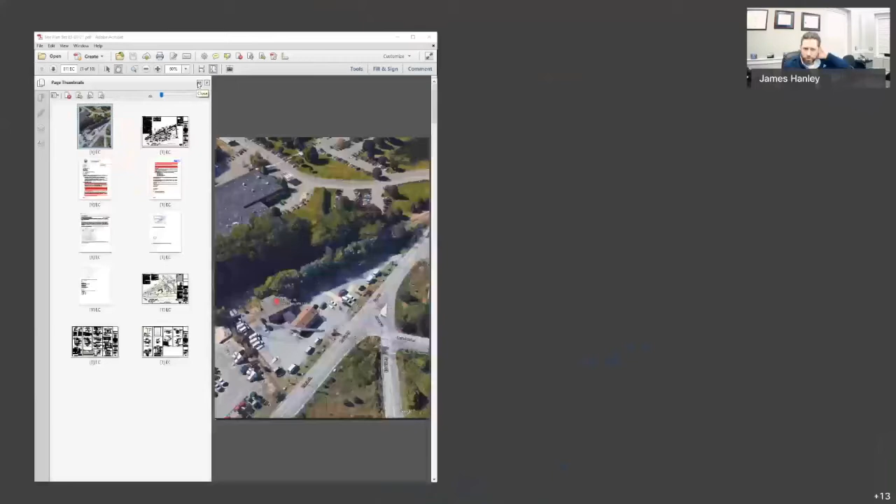Okay, so it's been a few weeks since the last time we met. Just to kind of give you a real quick once over to refresh everyone's memory, 913 East Street. There is an existing commercial facility here. The entire parking lot is essentially paved. What we are proposing to do, and we're working our way through some final comments with the planning board, only specific to sidewalk, is to provide a 7,000 plus or minus square foot building addition to maintain the same existing use.

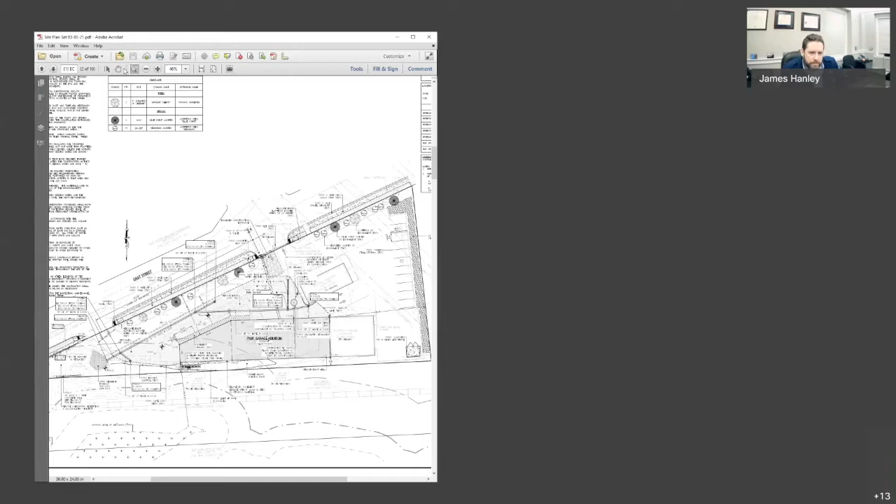And that's about it. We've got about 800 square feet of additional impervious surface. And because there are wetlands centrally located off the property, we have nothing on our property. We then have the MBTA tracks, but on this property here to our south is a wetland pocket.

And that was brought to our attention by Stefania, and because of that, it brought us into the commission for a notice of intent review. The changes to the stormwater pond are minimal. We've only got 800 plus or minus additional square feet. All we're doing is modifying the outlet structure just a little bit. And by doing so, we have been able to bring the project into compliance with the stormwater management standards to the maximum extent practical.

We've gone back and forth quite a few times with the engineering department, and at this point we do not have any outstanding items related to either conservation or stormwater. So we thought it was a good time to get back in front of you and see if you have any additional questions, and if not, hope to close this out tonight.

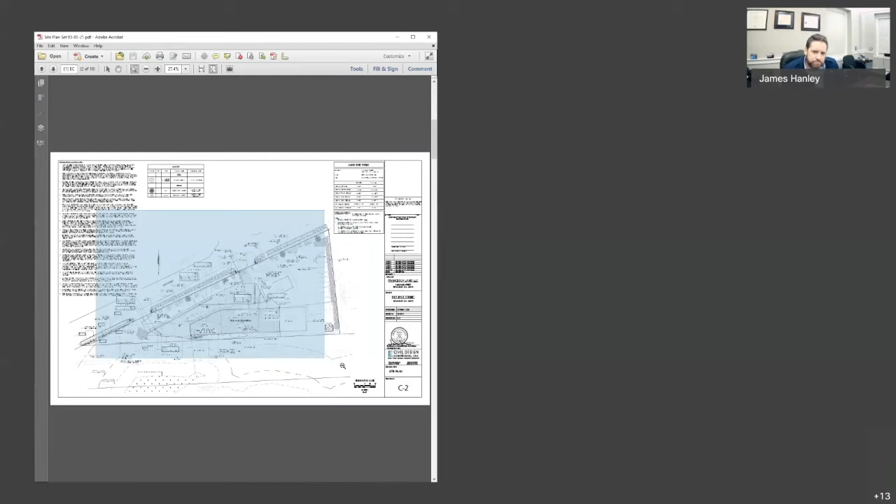Okay, Stefania, any issues? Just real quick, the paint substance in the back of the property. Yeah, so I do see that the plan is to clean it up during the site work, but the town engineer had recommended that we do that beforehand.

Is there any issue with doing that beforehand? No, I don't think so. Maybe if it's a condition of approval prior to construction, something like that, we could do that. What it is, the existing garage is rented out to a company that cuts granite for countertops. There's some spoils from the wet saw that run out and solidify, making it look like paint, but it's really just tiny bits of granite. So, we're between a shovel and a backhoe, clean that up, and even prior to construction, that would be absolutely reasonable.

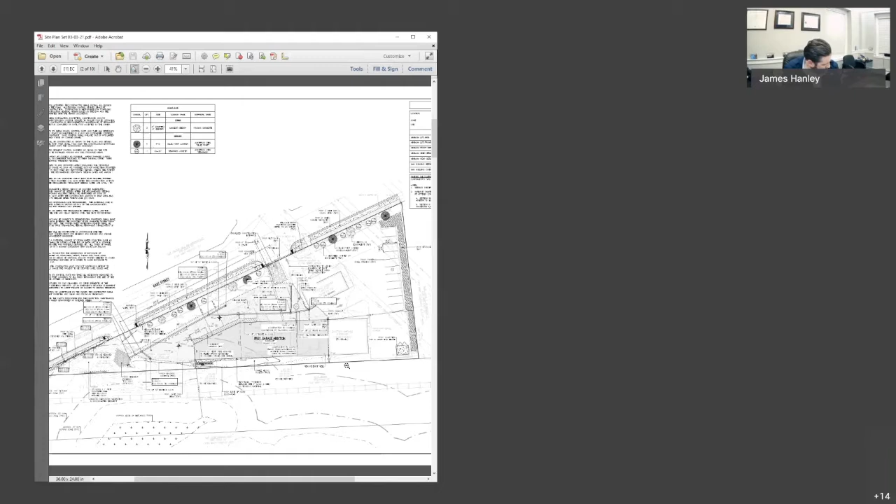I think, Stefania, that maybe when you go out to inspect the erosion control prior to construction, that'll be cleaned up. You'll be able to view it at that time.

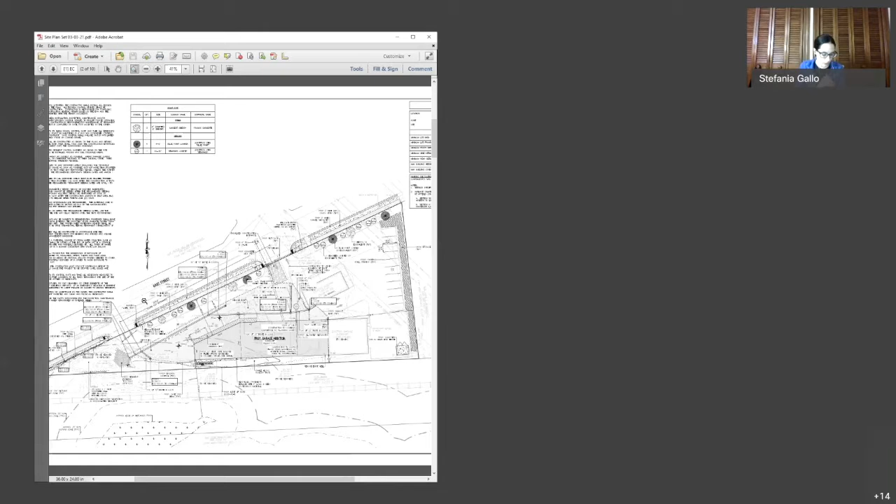The other thing I just want to make sure of, the last letter I have from the DPW from March 9th, comment number 5 about the watershed plan. I just want to make sure that there will be nothing that comes about to address this comment that would affect anything on the site.

That's a good point. So one of the comments he has is that because we only need to capture 800 additional square feet on the site, the easiest way to do it is to pull it off the roof and put it into a subsurface system. We just don't have architecturals done, so we don't do that until we know locally we can actually build something. So what we suggested Monday night to the planning board was to make that a pre-construction condition. At that point we'll have a roof plan designed from the architect. It's really not a civil issue, it's the architects.

We'd be happy to have the same condition here as well. Okay.

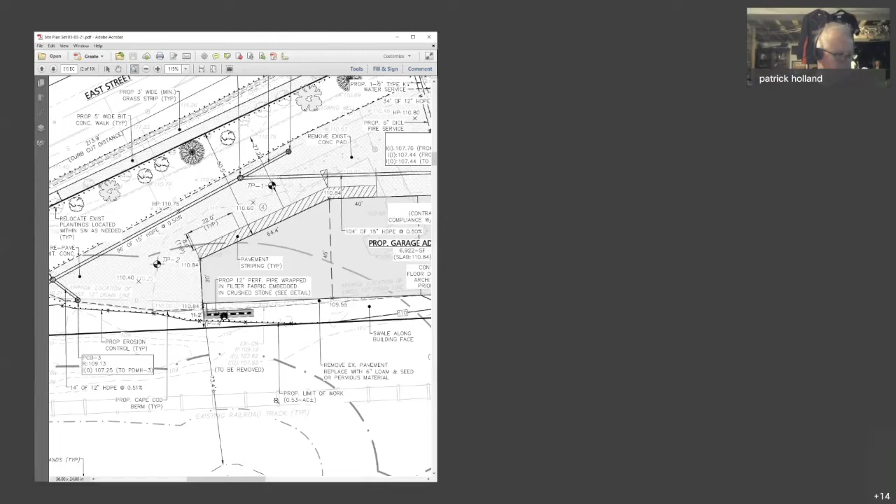Actually, Stefania's touched base on that, the white substance that I was going to ask you about, but I'm still going to ask a little bit more. Is that going to be a continuing process, or is there going to be a system in place that prevents the white stuff from going back into it?

Yeah, so it is not going to be a continuing practice. We're going to have a water circulation system. The applicant is aware of it, he knows he needs to address it. The final solution we don't know, but what we do know is that we can't do what we're doing, which is it runs outside the garage door and outside. We can't have this stuff in the stormwater system because when it dries, it gets really tight, like concrete. So we can't have that there.

So we are aware of it. He's got to come up with a system to allow the tenant to still use the building, but to be able to operate the equipment safely. So that's something he's working on.

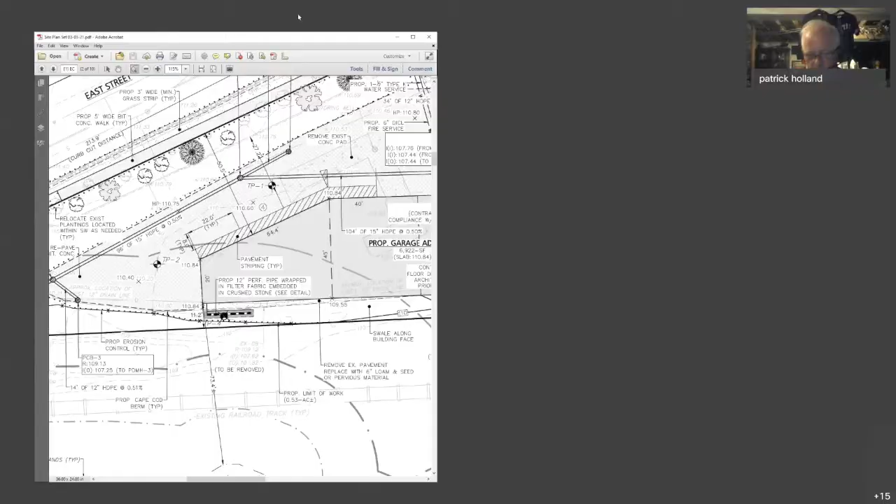Mr. McMullen, do you have anything? No questions, Mr. Chairman. Mr. Ronan? No, all my questions were answered. I was just worried about that granite runoff stuff, and it seems like it's being taken care of. Okay. Mr. Sheehan? No, I'm good. Mr. Walsh? No question.

Okay, the only thing I'm gonna say is that included in the order of conditions is that that site is cleaned up before construction, and add to the standard order of conditions. And I would also like the applicant to provide the Conservation Commission with the final plan of how they're gonna deal with this white stuff coming out the garage door.

Does that sound reasonable? Yeah, it sounds fair to me. Okay, Mr. Chairman, I think we should probably, just so it's probably more technical, instead of calling it the white stuff, because none of us really have a handle on it, we should just call it the granite slurry. But we can call it a pollutant if you want to.

No, I'm just saying so that we, instead of saying... I'm just thinking, I don't want someone to come in and say, alright, now they're cutting black granite and it turns out to be black powder. I want them to know that the commission doesn't want any slurry out there, regardless of what the color of it is. That's the point I was trying to make. Okay.

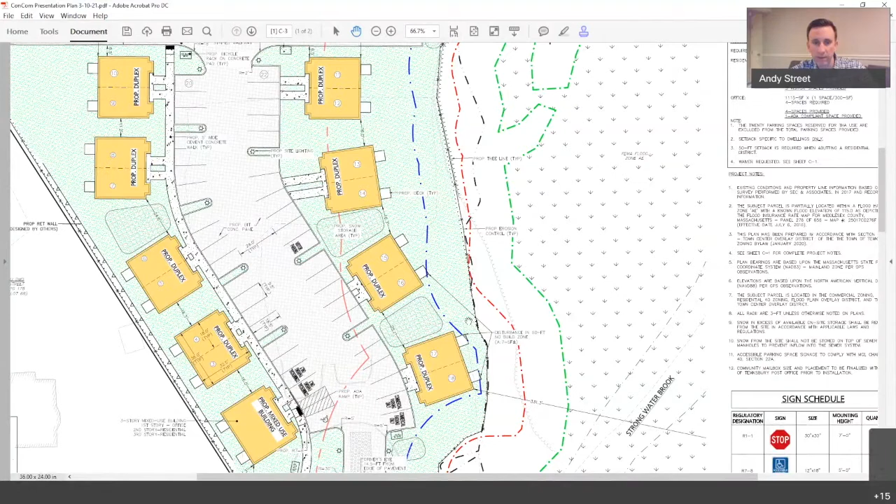We have very minor disturbance in the 50-foot no-build zone, but that's really limited to decks, about 9 square feet. I believe there was some back and forth in my office about whether those may even qualify as buildings. But even if they were, we're still well below the threshold to allow that work within the 50-foot no-build zone.

I have the grading plan and utility plan here as well, to give you a sense of the work taking place in the buffer zones. All the stormwater from roofs, paved surfaces, and some grassed areas is captured in catch basins and then piped into subsurface systems where it'll be infiltrated to the best extent it can, and then we have an outlet pipe.

There's a system in the front with an outlet pipe that heads towards the wetlands, and a system in the back, again with an outlet pipe that heads towards the wetlands. Those systems are designed to get the necessary pre-treatment and infiltration to match peak flows. We meet water quality volumes, recharge volume, all of that.

And then the roofs, several of the buildings, the roof areas will be infiltrated in their own subsurface systems located behind the buildings, which we've been careful to keep beyond 50 feet from the wetlands.

I think there are maybe two other notable changes. We have the buildings shifted back, and we have a little more parking located in the buffer zone. Again, all that impervious area is pitched towards a catch basin and captured and infiltrated before it outlets towards the wetlands.

I think the other notable change is, in the previous application, we were claiming a small portion, really the front part of the entrance, as redevelopment. This site has rapid infiltration rates, so there needed to be 44% pre-treatment prior to infiltrating, and we weren't providing that just for this front portion of the driveway.

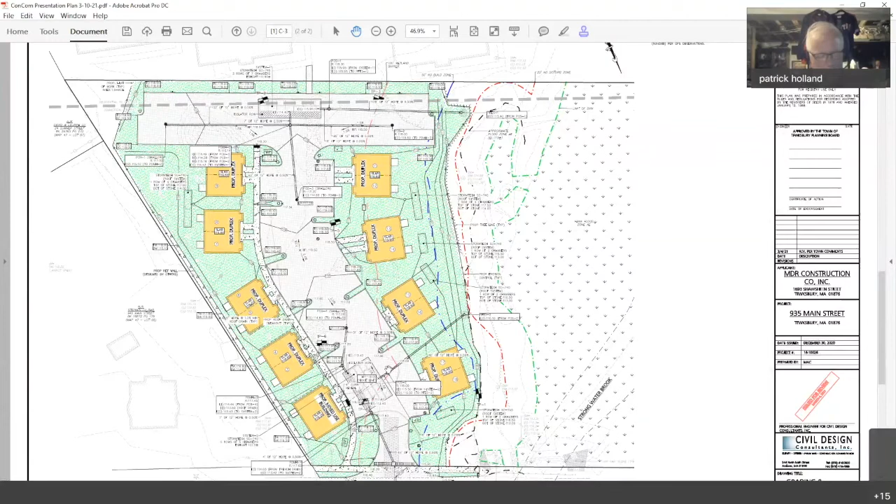Yes, that is shown on the site plan. We have a pocket of it in the top left corner of the plan, a couple areas between the buildings, and a pocket shown over here as well, between 50 and 25 feet from the resource area. The operations and maintenance plan recently submitted has updated language discussing removing snow, particularly from this area, and then in the spring restoring that. So if there's debris left over or it's a mess in that area, it gets cleaned up, and if the grass needs to be reseeded with more loam, that will happen as well.

So will there be any permanent snow fence or erosion control in that particular area? Not permanent, no. We'll certainly have erosion controls there for construction, but we're not proposing anything permanent like that right now.

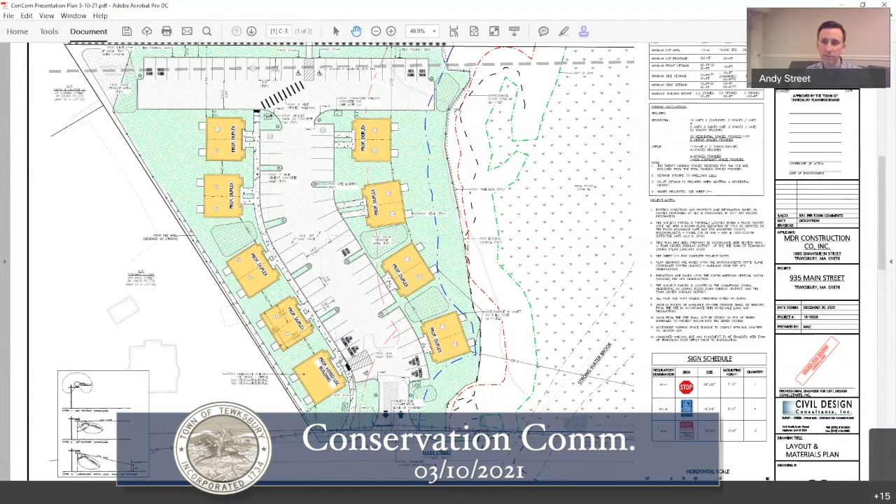So they're just going to plow, whether it's trash or not, right into the wetland? Well, the idea is that we're 30 feet or so from the wetland, and as with all snow storage areas, if it exceeds this or gets any closer to the wetland, it will be trucked out. The areas are designated on this plan, and if the amounts exceed it, it needs to be removed from the site.

Okay, my next question is, are these rentals or are these condominiums? So Mr. Sacconi's current plan is to hold on to this property and have them as rentals, and then for the commercial space, he's talked about using that for his own business office for MDR construction.

Okay, so MDR construction. So it's going to be office space, not construction vehicles on the site at all the time. Correct, yeah, just office space. Yes. There will never be construction vehicles on the site.

Okay, so is this a public road that is maintained by the town, or is it maintained by yourself? It's maintained by myself, sir. Okay.

Board members, any questions? No, he just answered an important question asked by you, Pat, which was I know Mr. Sacconi will keep it very clean at the snow dump sites and everything else. But I'm good. Okay, Mr. McMullen? No questions, Mr. Chairman. Mr. Ronan? No questions. Mr. Walsh? I got one question.

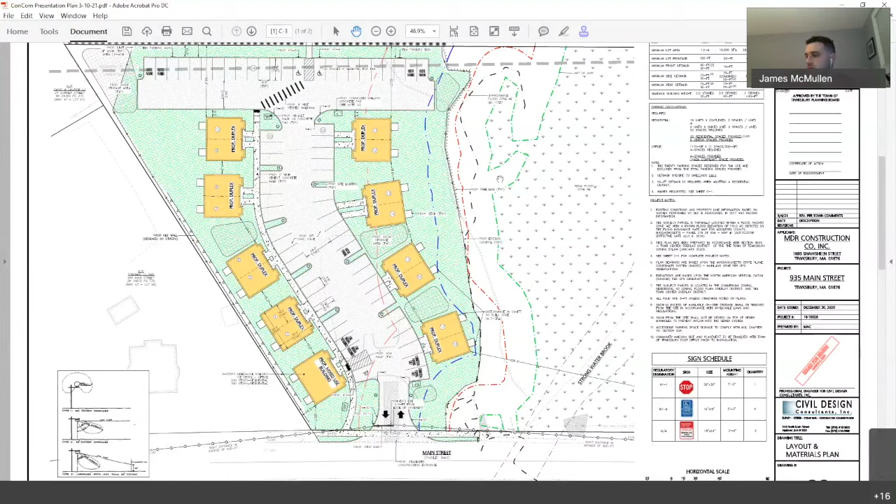We'll see you in a couple of weeks, gentlemen. Thank you, I'd very much like to say thank you to the commission. Okay.

Which one was continued here? That's continued. It's continued. That was... that was approved. All right.

So now we're on to item D, notice of intent. Arnie Martel, 920 and 978 Livingston Street. Map lot 77-2 and 63-51, DEP number 3051131. This is a public hearing, so the phone number is 978-771-0819 if anybody wishes to participate. Is there anyone here on behalf of the applicant? Jim Hanley, Civil Design Consultants, Mr. Chairman, along with Dick Cuoco and Arnie Martel himself.

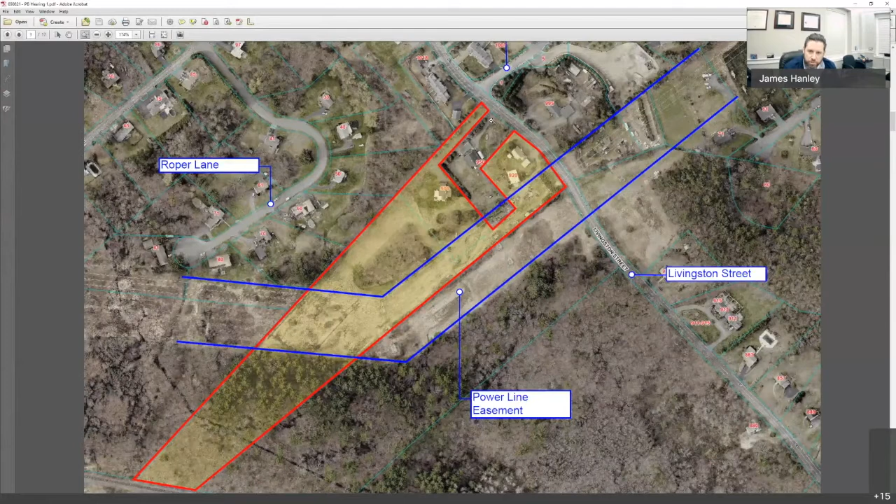I would like to share my screen and walk through the project if that works for you. That's fine with me. Okay, so here we are. We are along Livingston Street. We have two parcels that are combined here: 920 Livingston Street and 978 Livingston Street. 920 has frontage directly on Livingston Street, there's a single-family residential there. It also has 7.5 acres, which is basically all of this area back here where the proposed development will be. We've combined this with 978 Livingston Street, which also has a single-family house, has about 1.5 acres, and has its own separate 40-foot frontage area along Livingston Street here. So when we combine both of these parcels, we end up with about 9 acres, about 2.5 acres of wetland. Just to orient you a little bit, we're south of Blue Spruce, which is right here, and north of Pinnacle, which is further down here. We have the high tension line power easement, which is 200 feet across in the blue area here.

Just to orient you a bit more, this is a screenshot off of Google Earth, and you can see 920 is a single-family residential, 978 is a single-family residential here. There's an existing driveway that we'll basically remove or replace with a private roadway that'll be 20 to 24 feet in width, depending on where it is. That'll provide access down to this yellow circle, which will have 3 additional lots on it. So this is what it ends up looking like in plan view here.

So the proposed development includes 5 lots in total, but we only have 3 additional lots. So for 920, we end up carving out 1 acre. That ends up being a standalone acre and is not part of this subdivision. Then we end up having to reconfigure the lot that currently exists as 978. That again will have 1 acre but will front on the new private roadway. And that brings us down and provides access for our 3 additional lots.

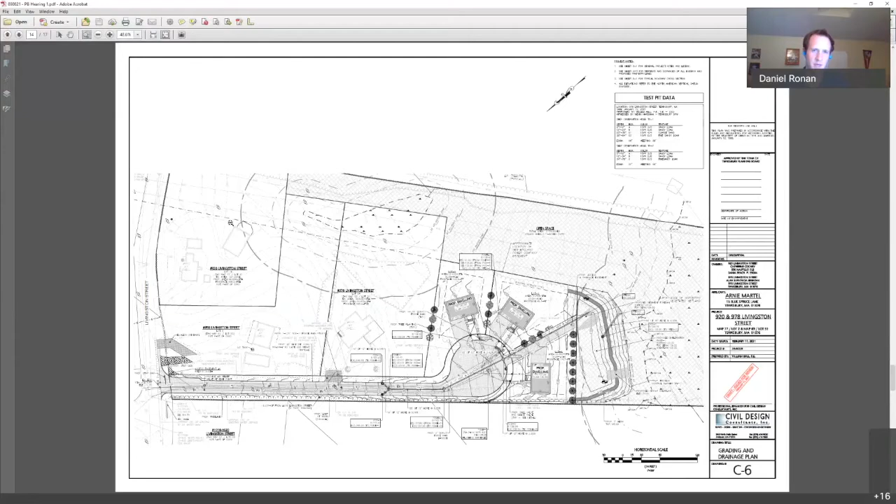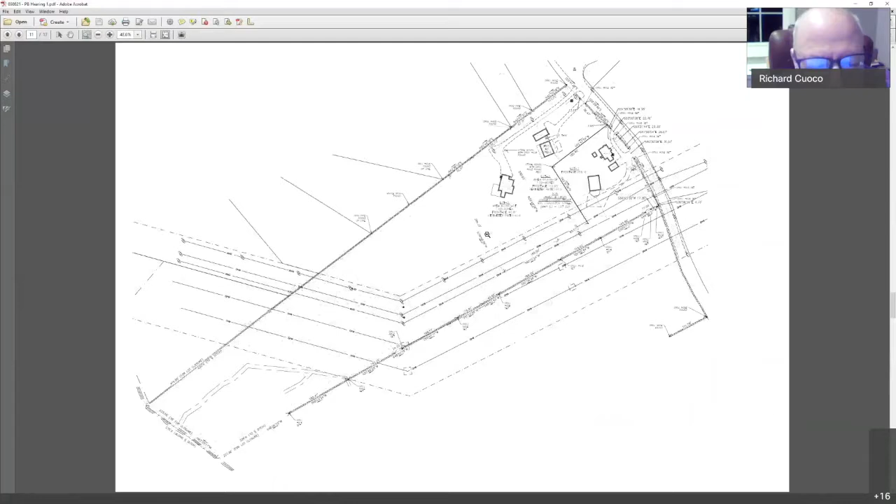The property is owned by the homeowners association, but the power company has an easement on it. So anything that they can legally do relative to adding transmission or rerunning transmission lines, whatever they have to put in there, unfortunately the homeowners association can't stop that. But that does not relieve them from having to go before the commission to get permission to do any of that work, should it be within 100 feet of the wetlands.

We would like it if we could tell them to take their poles out of there, but unfortunately we can't. You're dreaming.

Just so you know, this is kind of unique. A lot of times we come to you with a site plan that has open space that's all wooded. Here it's different — you can see in this photo that a lot of it's within the easement and it's grazed, it's like pasture land basically. So it's not like if National Grid goes in there, they're going to be disturbing it significantly. It's already disturbed in that area. Just another consideration.

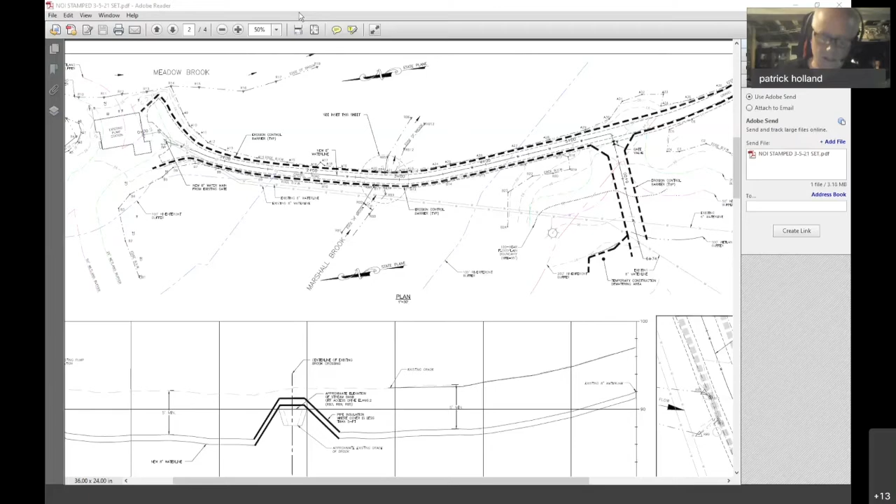Now I'm going to entertain a motion to approve the notice of intent for Roger Gauthier, Tewksbury Hospital, DPH, Commonwealth of Massachusetts, 630 East Street, map 89, lot 1, DEP 3051130, with the standard order of conditions to include a monitor when construction is being done around the culvert that has been noted. Does that sound reasonable, Stefania?

Have a motion to that effect. So moved. Have a second. Second.

Mr. McMullen, how do you vote? Aye. Mr. Ronan, how do you vote? Aye. Mr. Sheehan, how do you vote? Aye. Mr. Walsh, how do you vote? And chair votes aye as well. Thank you, sir. Thank you.

All right, and I just threw my agenda away. What are we going to do with you, Pat? I don't know, I got so much paper here. Let me see.

I can just read it off of this one. This next item is item F, correct? Correct. Notice of intent, Mark Roca, 1023 and 1029 East Street, map 103, lots 80 and 129, DEP number pending.

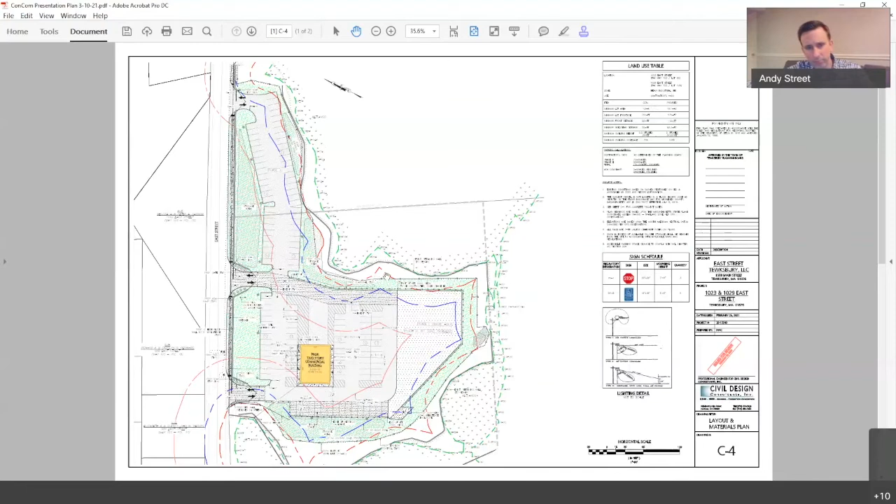The 25-foot zone is something that came up in part of Stefania's review letter. We show that this 25-foot, at least as it pertains to this development, is contained on top of this cap. It's not a woods or anything—it's previously disturbed. We have an area that was capped and permitted through the DEP and this commission to fill it in and provide that retaining wall.

What we are proposing in that 25-foot is some minor grading. We have some grading that comes around the edge of these parking areas. There's an outlet pipe associated with a stormwater system here, and then there are really small pieces of parking area itself, a little bit of pavement.

According to Norse, that wetland is kind of low value. The 25-foot itself is inside or on top of this capped and previously disturbed area that would be further enhanced—planted with landscaping, grass and loam and seed to stabilize that area and improve the condition it is in today.

From a stormwater perspective, the dotted areas you see in phase one associated with the building—we have the parking, the entrance drives through here—that's supposed to be pervious pavement. Part of the challenge with this site is because it's capped, we're really limited in how we can grade it.

We can't cut, so everything needs to be at or above existing grade as it is today, as designed as part of the formation of the AUL. So we use this porous pavement in order to capture and infiltrate. PAR Corporation has been retained as an LSP to review all the documentation that goes with the AUL, the capping, and the environmental monitoring, and issued a memo saying this cap is designed to be pervious. It's pervious today, it's grass and gravel today, so infiltrating into the cap, certainly in the way we're proposing, should be acceptable. Using that and the grades, we've come up with this design for phase one.

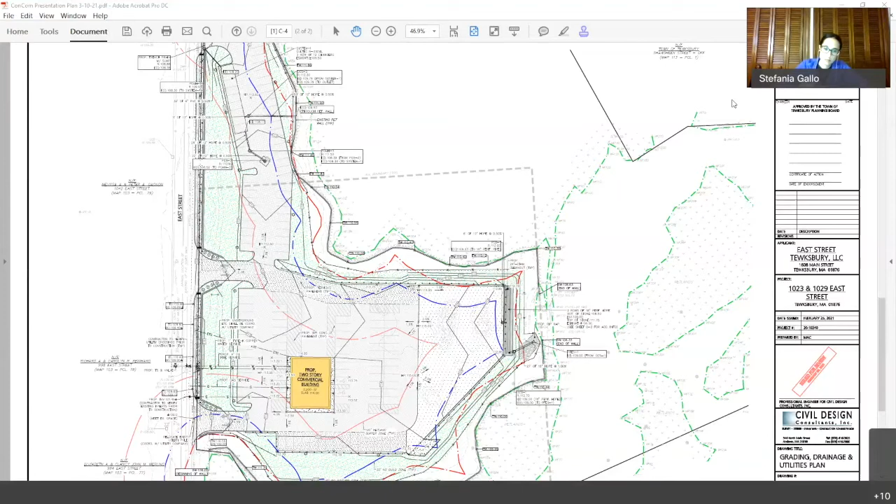So to kind of answer some of the questions that Stefania brought up, this was the site plan from 2007. Pretty much everything was about the same.

There was a major flooding problem on the opposite side of the tracks and down all the way to Shawsheen Street. There was also a real bad flooding problem up here on East Street. So part of the original proposal when this site was being built was to at least put in the retaining walls, mitigate the site, and allow for this ditch to be dug to provide relief from the stormwater.

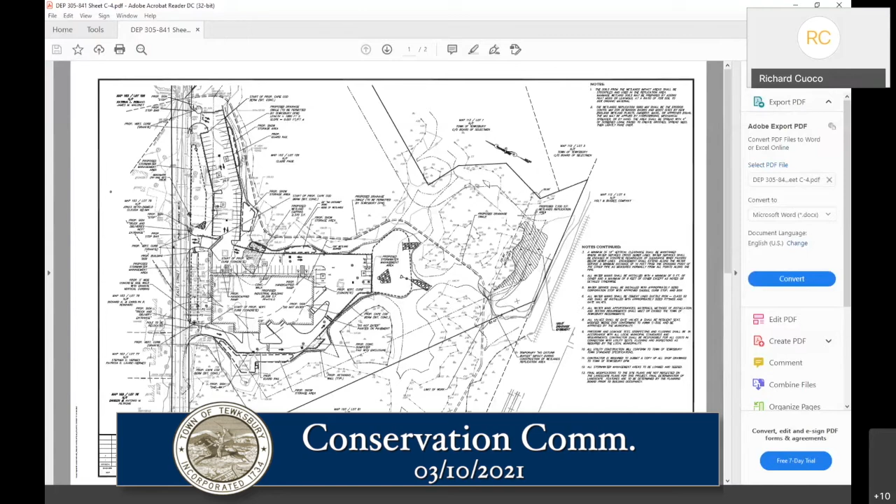That was something that was to be permitted and done by the Tewksbury DPW. The applicant, the owner of the property at the time, when working with another developer, did the work in this area, replaced the culverts and so forth, and then this ditch was dug throughout to go down, and it goes all the way across down into Shawsheen Street.

And that alleviated all the major flooding that took place out here on East Street, and it also, in cooperation with some other work that the town did and some private people did at the power company, alleviated the flooding, and the beavers were removed. So that's how that ditch got in place.

This whole area here where the wall is missing, this was approved as part of the stormwater detention area. So in order to construct that stormwater area, this section of the wall was left out. So part of the proposal will be to put that section of the wall back in again.

But from efforts that were done by the town, the power company, and others down on Shawsheen Street, there was never a need to completely build this ditch area through here to alleviate flooding. It's been since, I think, 2009 or 2010 when that work was done, and there hasn't been any flooding out there on East Street since.

And you can just see how the wetlands have migrated over the years, and they basically kind of come up to the wall. But that's what the history is on that ditch. And we will be putting the wall back in, and this whole system of drainage is no longer going to be used for the project because the wetlands have crept up into this area. You can see this was all upland back in 2007. So I hope that sheds some light on that ditch and pipe and other things in that area.

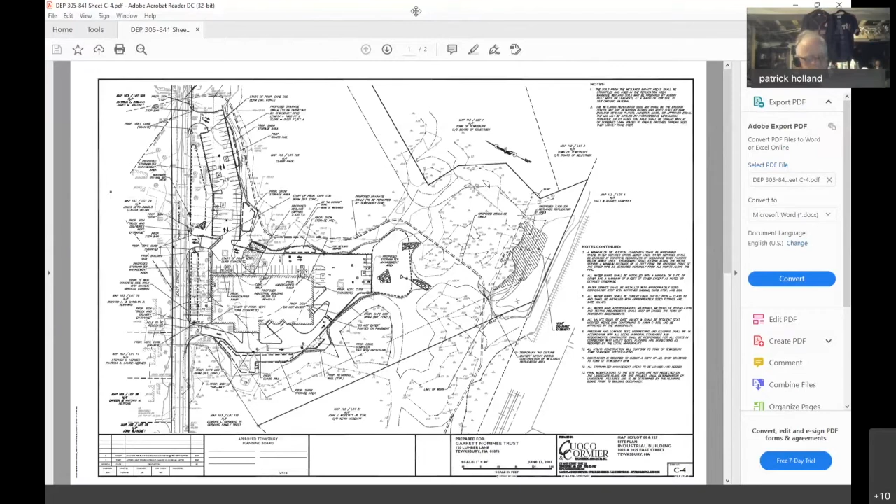If I might add, Mr. Chairman, just regarding the AUL and the LSP, just a little more information there. So they're in the process of preparing a soil management plan, health and safety plan. There's a number of documents that need to be prepared to comply that all pertain to construction activities and what can and can't be done, the treatment of soils, and certainly if the commission would like, we're happy to provide those once they're prepared and they will be adhered to if and when construction moves forward.

Okay, I just have one question.

Since the DEP assisted in the mitigation of this property, do they have to oversee the entire project now? My understanding, and we can get clarification from the LSP, is that there are procedures in place to allow work at this parcel. We're coming to this commission for approval, and I'll confirm all of this, but I believe the order's been closed for the capping itself. There's some ongoing monitoring that needs to take place, but it's been set up to allow development.

As long as we coordinate with the DEP as necessary. The main component, Mr. Chairman, is as long as the elevation where the wall is and the grade where the fill was put in can't be compromised. In other words, we couldn't lower the site even if we wanted to. It has to stay at the elevation where that cap is.

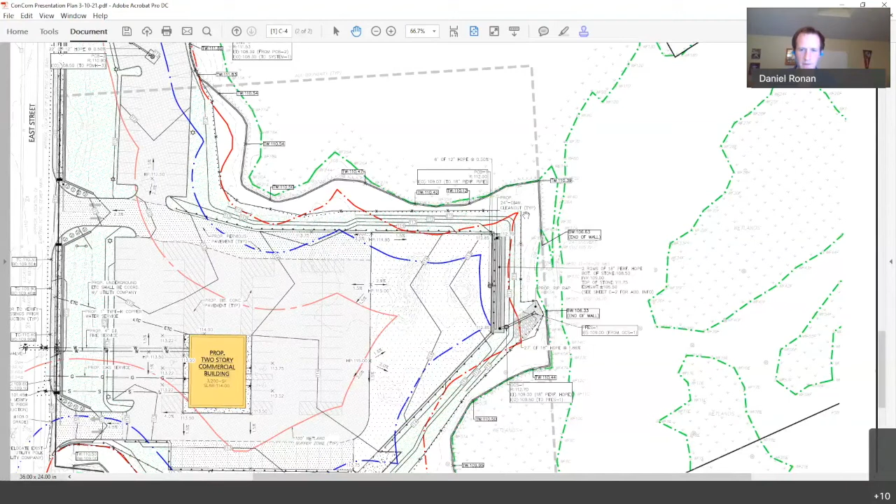So if I zoom in, this kind of gray line, I won't go around the whole site, but on ours we have these TWs. I meant more of the actual design, like what type of wall it is, or any pictures of the wall and stuff? We did not include that, but we certainly can. The intent would be that it's a modular block wall, nothing fancy, and that would fill what's missing.

Thank you, no further questions. Mr. Sheehan.

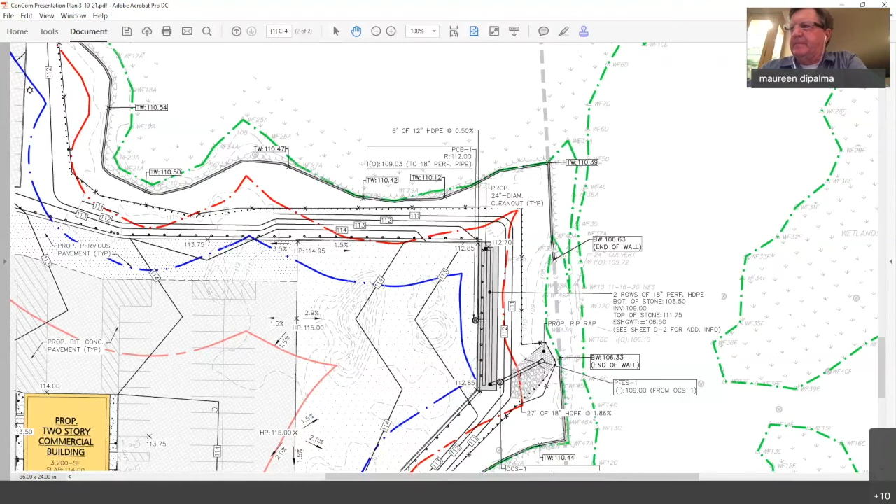Is this building going to be built on pilings? I'm pretty sure it is, Mr. Sheehan. The architect will be challenged with that once we get approval to move forward. I know the building commissioner always asks for that anyways, but knowing the history of the site, we would recommend it even if it wasn't required.

Okay, that's all I have. Mr. Walsh, I got one question. The parking lot slopes significantly towards the street. Is there adequate drainage within the street to take the additional runoff?

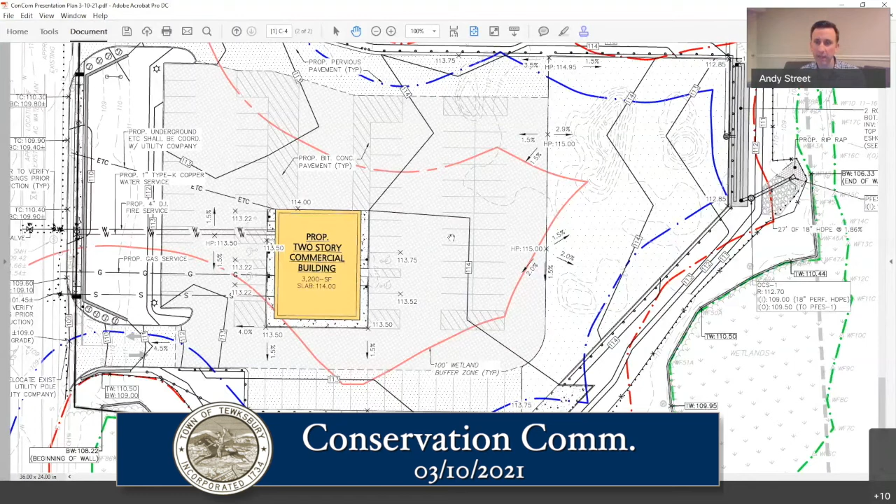The intent is that the driveway entrances are porous pavement, so runoff will be collected in the driveways themselves. Part of the grading challenge here is you have to quickly get up high enough to reach the top of the cap, because we can't cut that out. We also can't cut in ponds near the driveway entrances for the same reason, we can't cut into the cap. So the idea was to make that porous pavement so the water doesn't run off into the street.

I'm sure this will get a close look from the DPW and town engineers. They do their review because they're equally as concerned as you about runoff into the street. So we'll continue to work through it from this commission's perspective and with the DPW. Thank you.

Okay, I just have one more question, maybe it's two. Now, it's a commercial building, and you said something about are they fixing vehicles there? So the business operations have a lot of trucks that leave the site daily, go to various locations, do their work, and come back. There's a garage bay that goes with the building, you can see the striping associated with it.

My understanding, and if someone knows differently please correct me, is that it's really where they'll pick up new gutter materials or things like that, but it's not a repair shop, nothing like that. So it's not going to be storage of vehicles or anything? Right, yeah.

Mr. Chairman, just for further clarification: the trucks associated with the business, if there's any repair work necessary on a truck or vehicle, it's not done at this site, it's done at an off-site location. So to clarify, nothing is done here in terms of upkeep, repair, or maintenance. Any repair or maintenance to the fleet is off-site. Okay, that was my question, I was leading to the fact we don't want to start dumping more car oil or anything else into the ground that's already there. Yeah, nothing of that sort would be done.

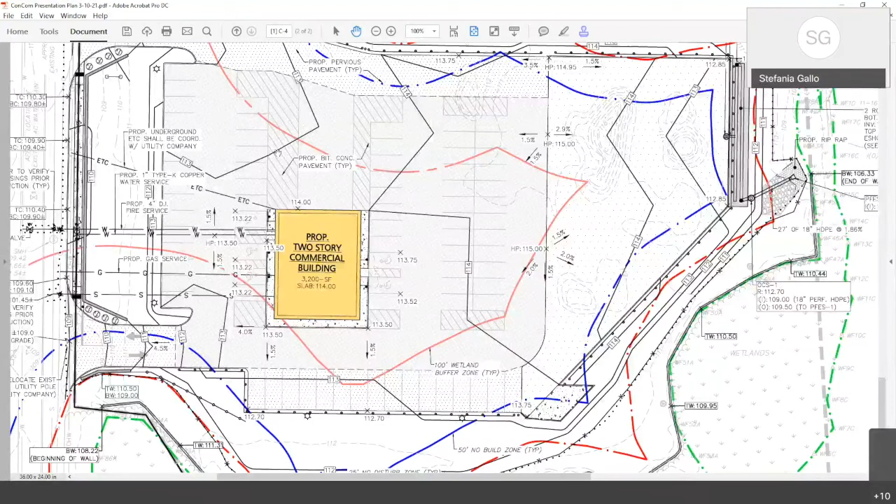Okay, alright, with that being said, I am going to entertain a motion to continue to our next meeting on... when's our next meeting, Stefania? The 24th. I'm going to entertain a motion to continue.

Notice of intent of Mark Rocco, 1023 and 1029 East Street, map 103, lots 80 and 129, DEP number pending, continued to our meeting of March 24th. Can I have a motion to that effect? So moved. Can I have a second? Second.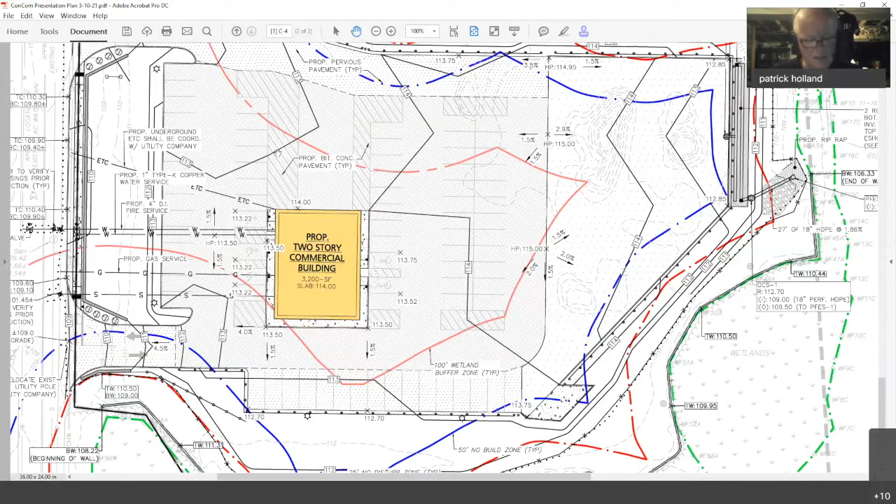Mr. McMullen, how do you vote? Aye. Mr. Ronan, how do you vote? Aye. Mr. Sheehan, how do you vote? Aye. Chair votes aye. Mr. Walsh, how do you vote? Aye. Chair votes aye as well. Gentlemen, we'll see you at our next meeting. Thank you, sir. Thank you very much.

All right, next on the agenda is request for extension of order of conditions, JDS Enterprises Incorporated, 940 and 960 Main Street, Map 47, lot 76 and 77, DEP number 3051022. Is there anybody here for that?

I wasn't sure if anyone was going to come, but it's a pretty simple request. They're just looking for a 3-year extension to the order of conditions. Okay, I don't have a problem with that. Any question, board members? No questions.

No question. Okay, with that, I'll entertain a motion to request the extension of the order of conditions, JDS Enterprises Incorporated, 940 and 960 Main Street, map 47, lot 76 and 77, DEP number 3051022, and we need to find the date I prepared.